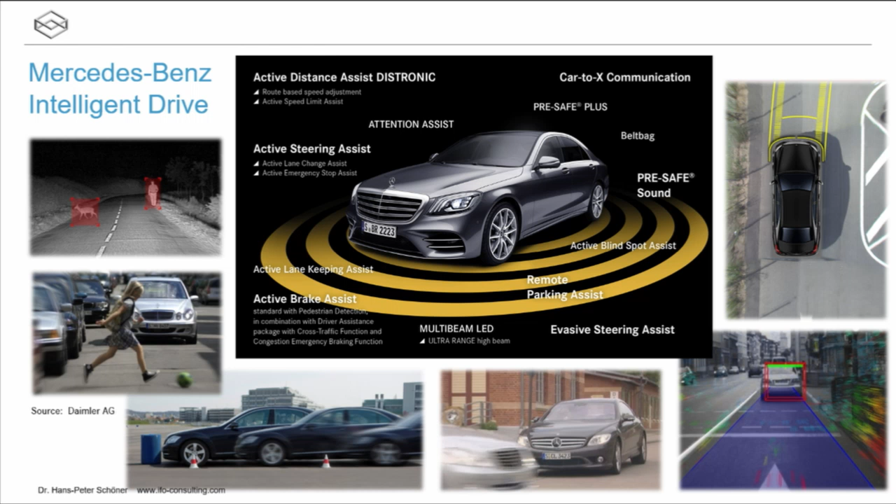To see what is state-of-the-art, I show you this next short movie, which tells us what is available now. You can start a car from outside with an app. You still have to make sure you are there, and then you can drive normally. But the car knows where it is. What is the speed limit which is appropriate?

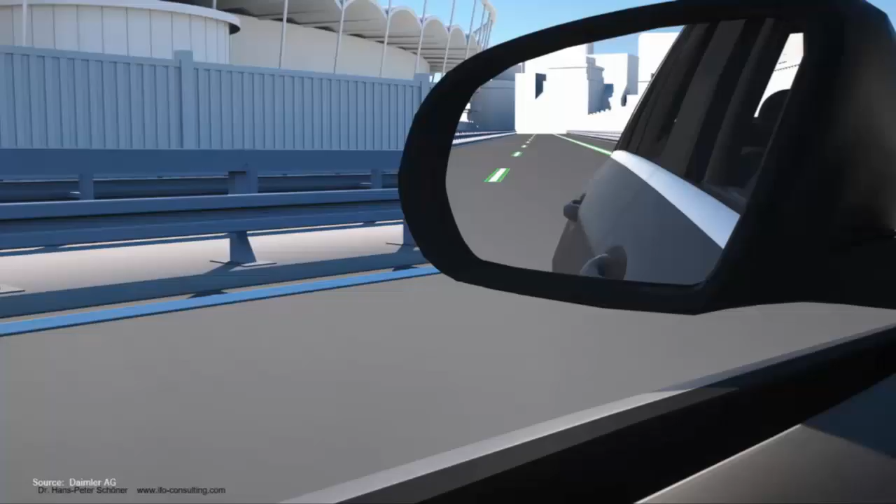Maybe when it's coming to a roundabout, to know there is a roundabout and you have to slow down to drive around a roundabout, even if you are in a mode of speed control. It knows about the curves. It can follow a track. It can pass other vehicles.

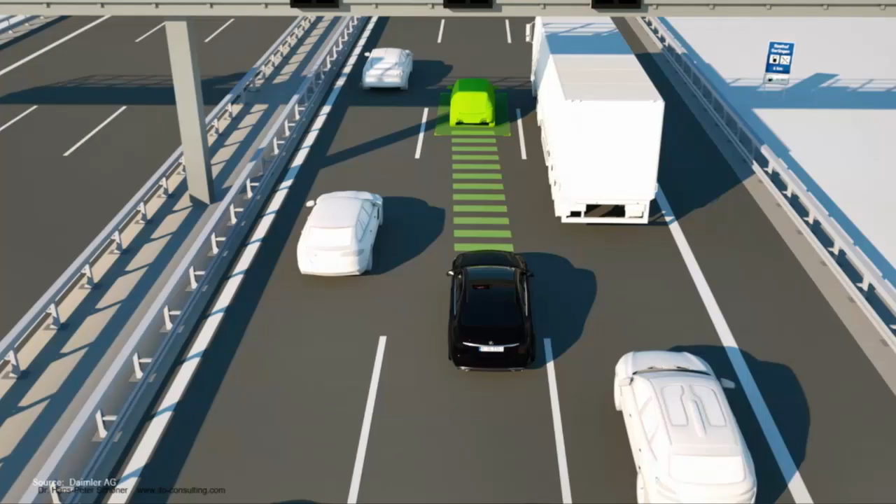But here, a situation where you didn't pay attention and this vehicle will still keep the distance and even slow down. And in traffic jam configurations, it is able to follow other vehicles, even when the markings are complicated with different colors, and even if the markings are not there.

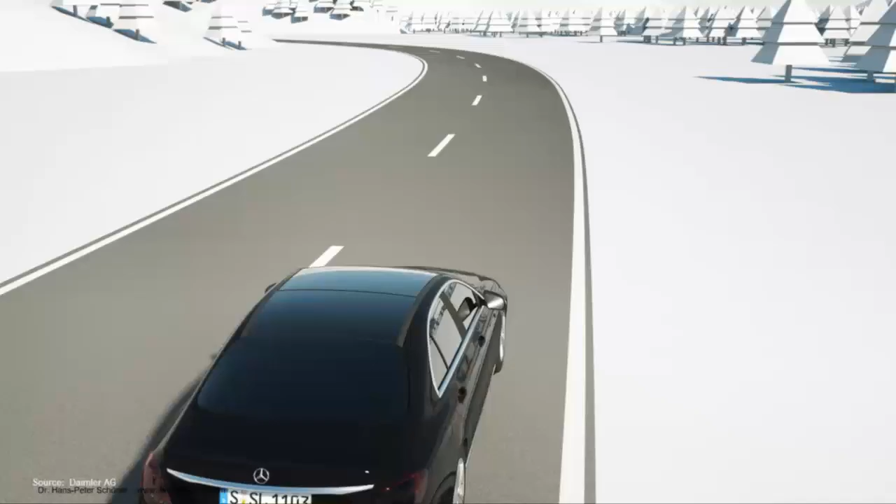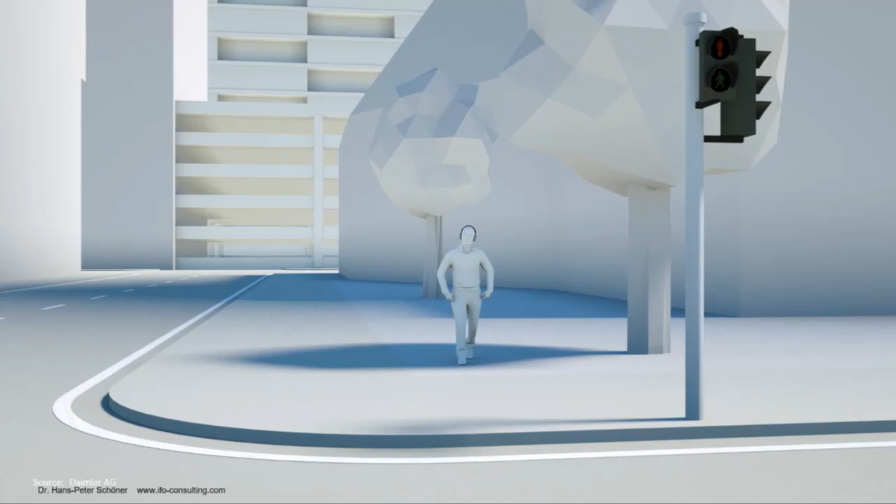If there's a traffic accident among Mercedes cars, the information is exchanged so the other cars know there will be something ahead. And driving into cities, it will know now it's in a city. Braking, autonomous braking on cross traffic, on pedestrians which are not attentive. But if the driver acts, it will not do anything.

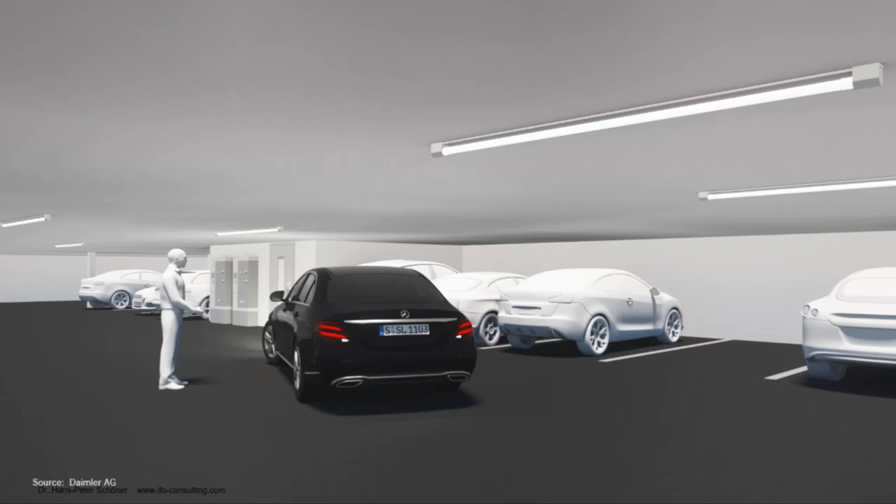And at the very end, of course, you can also park a car, being outside of the car. And all this is possible now already with vehicles you can buy, an S-Class, an E-Class, or cars of this size. And all those systems will probably be brought down to smaller cars like a C-Class or even an A-Class. And it's not only Mercedes-Benz, it's also other car manufacturers who are supplying similar systems right now.

One of the important things of all those systems is the driver is still responsible for everything the vehicle does. It's assistance systems, and we call them level 2 systems. So if we talk about autonomous driving, I want to point out what is the challenge there from going from where we are now to autonomous driving.

There are stages of autonomy which are defined by NHTSA, and level 0 is no automation. Level 1 is you have one specific function, but level 2 is what you have seen in the video. More than one control function, but the driver is expected to be there.

He is the one responsible for all the driving task, and he has to be available at short notice to take over and to turn off the system if necessary.

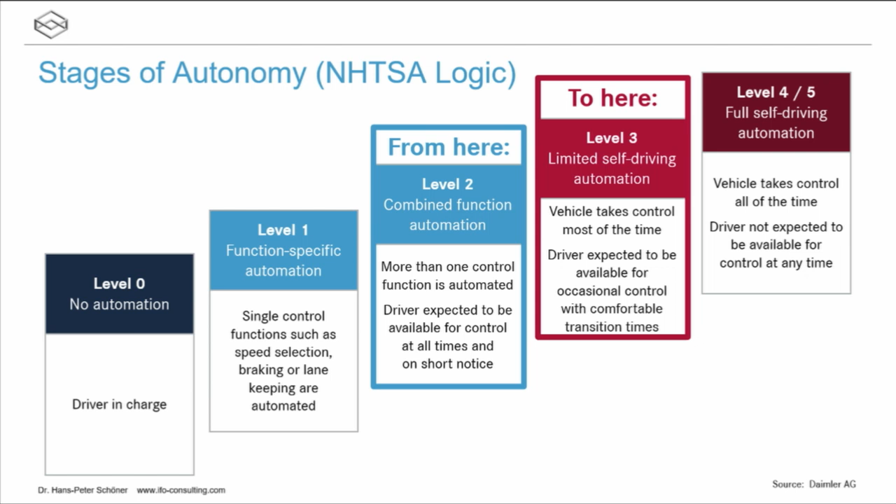Why? Let's first look at what has happened now. We have introduced assistance systems to the cars, and those have to help the driver in situations where the driver makes a mistake. And up to now, on German highways, that's about 7.5 million kilometers between mistakes which lead to big accidents. And in such situations, the assistance systems had to work. So those are relatively rare situations.

If you look in detail at the statistics, you find out most of these accidents are due to human errors. So you think, okay, human errors we can help. But the challenging thing is, in between, there are 7.5 million kilometers where the human driver doesn't make those mistakes. He does a lot correct. And now we want to automate all those things. And that means we have to drive those 7.5 million kilometers and maybe even more without any mistake, without any dangerous mistakes, of course.

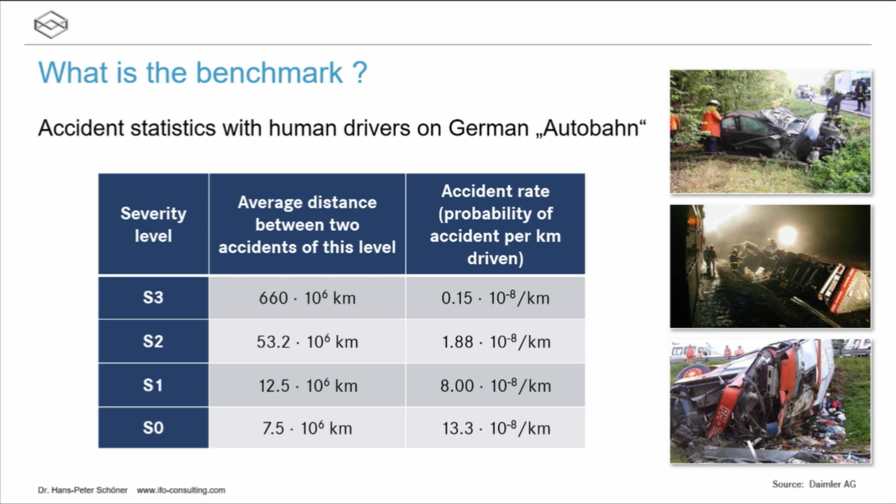And it's very similar in Sweden, it's a little less. You have longer distances and less traffic. In the US, it's significantly higher, and in most parts of the world, it's significantly higher, a factor of 10 to 100 higher than those numbers. So these are pretty good numbers, and everybody accepts that this 10 to the minus 7 per hour is an accident rate which is acceptable.

What does it mean for level 2 and 3? Level 2, again, the driver watches. Level 3, the driver is allowed to leave the steering wheel and to watch other things like a smartphone, reading emails, writing emails, and so on. In level 2, the system is designed so the driver can respond with a reaction time of 0.7 to 2 seconds, which is the normal range of reaction times, to warning tones, which tell the driver, now you have to react.

In level 3, we talk about reaction times of 10 seconds, which will probably be in the law. But even if you have lower reaction times, from 2.5 to about 5 seconds; 5 seconds is, from my experience in the driving simulator, the time period when most people, 95%, can react to some warning. But the other 5% need between 5 and 10 seconds.

What does that mean? If you're driving at 100 kilometers per hour, that's about 30 meters per second, you drive in those times 75, 150, or even 300 meters. 300 meters, if you look out from your car, is something where you barely can see what is there. So if you talk about 10 seconds reaction time, everything has happened in traffic. It's more like 3 seconds ahead you see what is going to happen, maybe 4 seconds, but not much more.

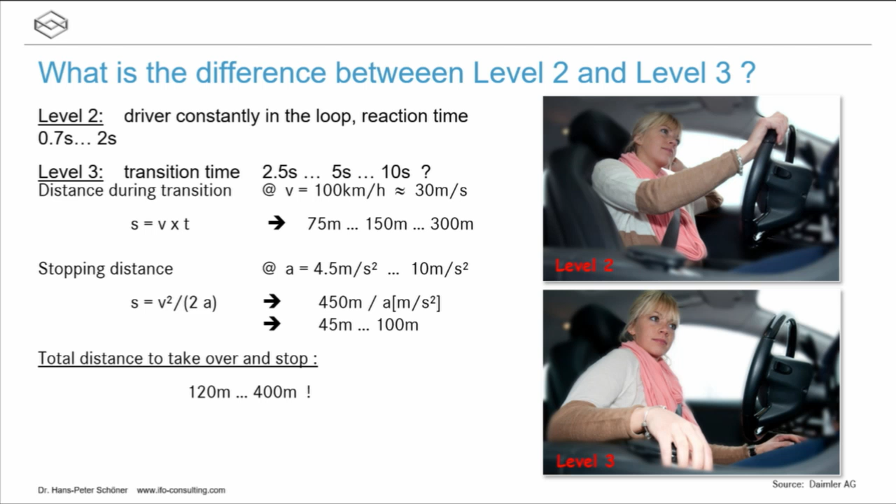And if you want to stop at a decent deceleration between 4.5 and maybe 10 meters per second squared, which is the physical limit on a dry road, then stopping is another 45 to 100 meters. And if you add those up, the reaction time of 2.5 to 10 seconds means 120 to 400 meters. You have to know in advance whether the driver has to take over or not.

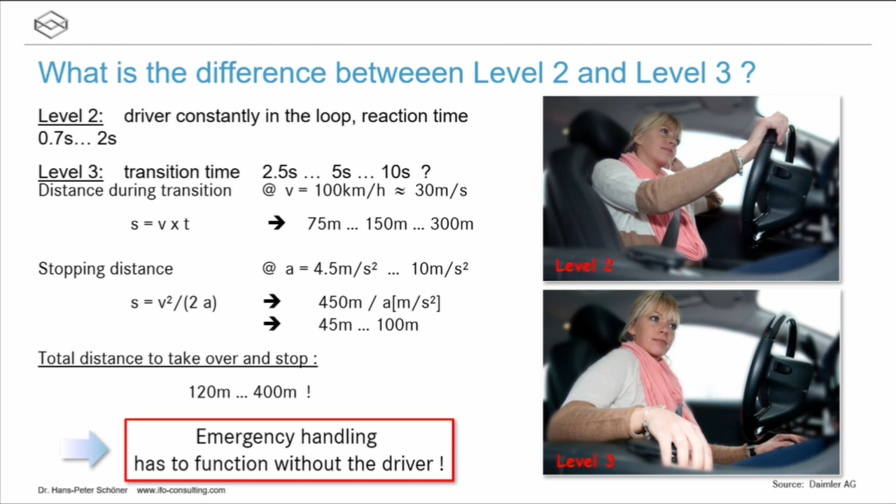That means emergency handling has to function without the driver. You cannot afford to tell the driver, oh, I have a problem now, I cannot brake, do something. The vehicle itself has to do it. It has to solve every urgent problem on the road by itself. If not, it doesn't work.

So this is my summary. Before an autonomous vehicle will drive you anywhere, it has to prove that it will not drive you into trouble. So how to prove that? And first we have to look at what is really the risk. Look at it from an engineering point of view of not only I'm afraid, but what is really the risk.

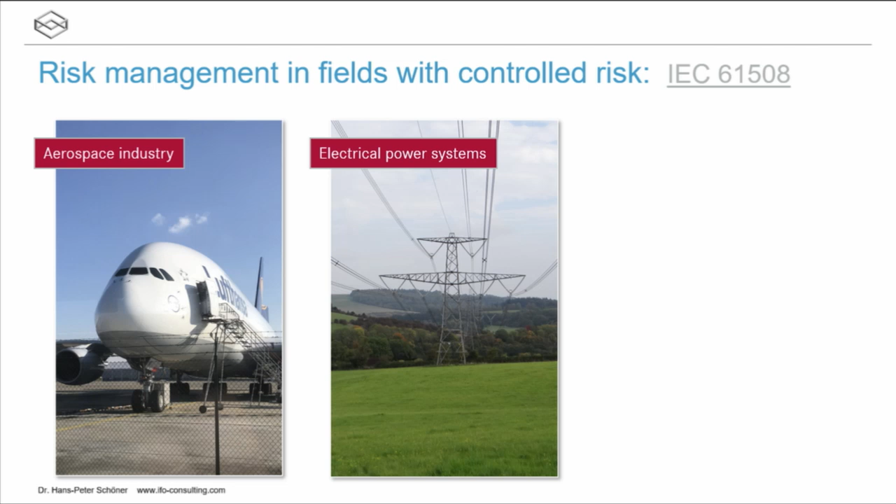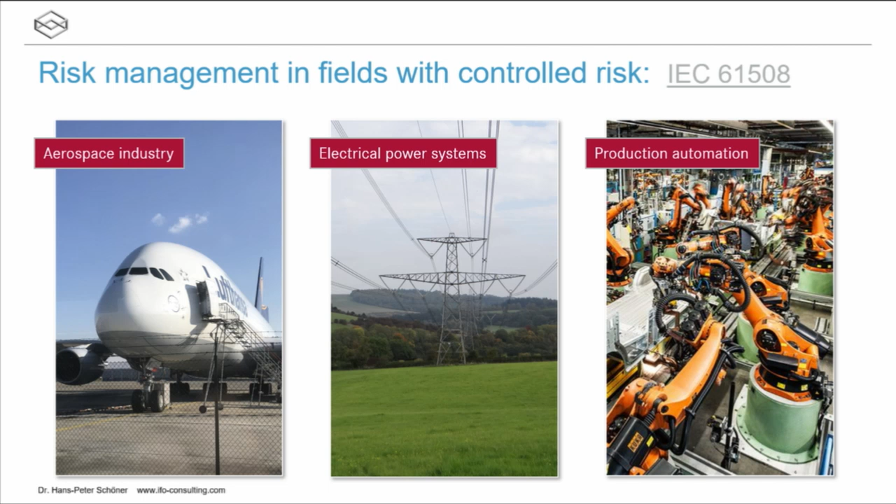Look at other fields of controlled risk: aerospace, electrical power systems, power plants, nuclear power plants even, but also production automation. They all use one standard, IEC 61508, which is the basis for how to deal with risks. There's one specific automotive version of this 61508. It's called the ISO 26262. And that's a risk-based safety standard.

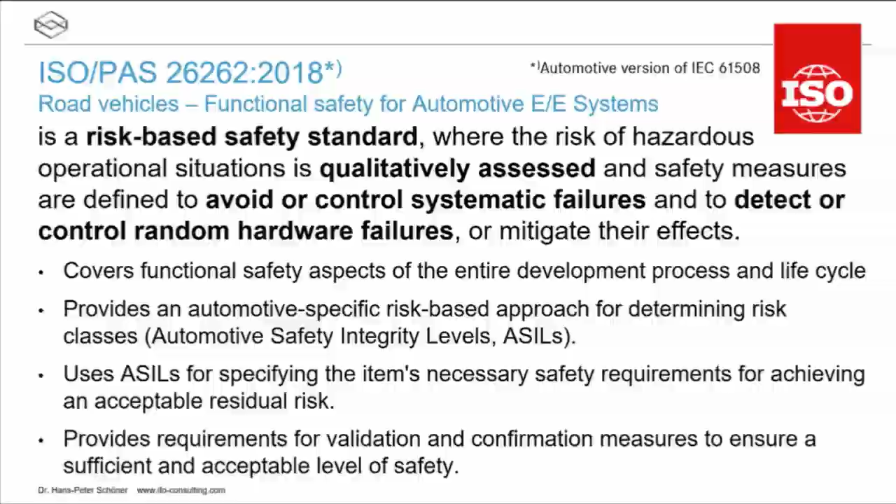It looks at hazardous situations. They are qualitatively assessed, and each dangerous, risky situation should be avoided by systematic control design or avoidance procedures. And also random hardware defects have to be avoided in a way that the number of faults per hour is less than 10 to the minus 7. There's much more to it. If I would go through that, that's a whole lecture on its own.

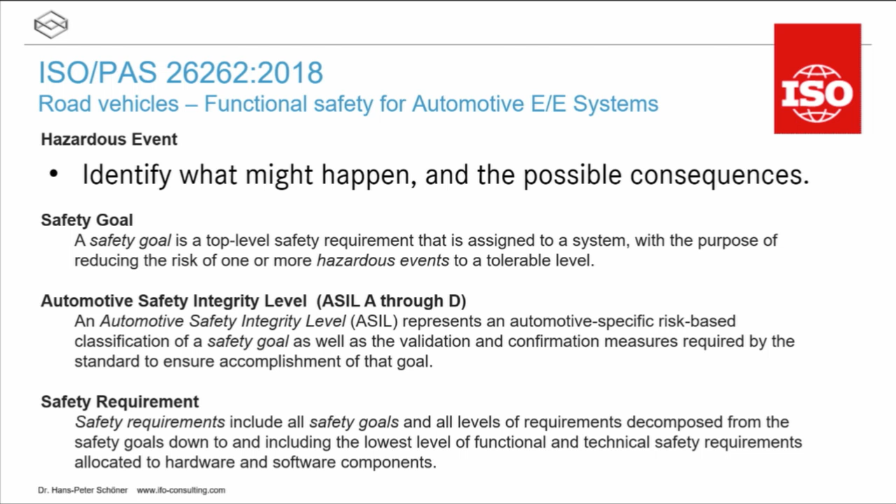But the basic is we talk about hazardous events. They have to be identified, what might happen, and what would be the consequences. You have to set up a safety goal, which is a quantitative goal, what kind of level of safety you want to reach in numbers of failures or deadly accidents per hour. This leads to safety integrity levels.

Depending on what kind of system you automate, if it's a really dangerous system like autonomous driving, you come to an ASIL D level, which means very rare accidents, and that comes to the level 10 to the minus 7 per hour. And this is used industry-wide. And from that, it's broken down to all the components in the vehicle: what is the safety requirement, the reliability requirement, and the availability requirements for that single component.

As I said before, this safety level assessment looks at 3 things on the level of risk. One is the severity of an accident, the exposure. That means how often do we come into a situation where that could happen, from incredibly unlikely to high probability that would happen almost on every drive. And then controllability classifications. That means in case you come into that situation, will you or your vehicle be able to control that situation?

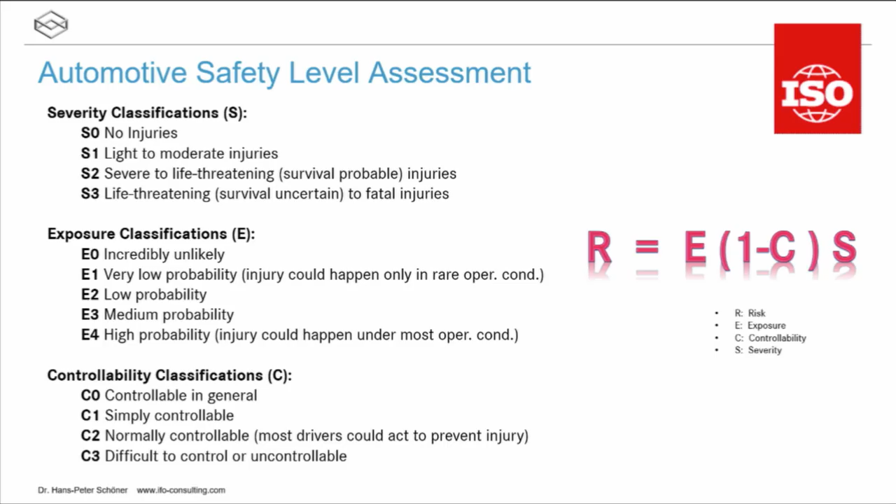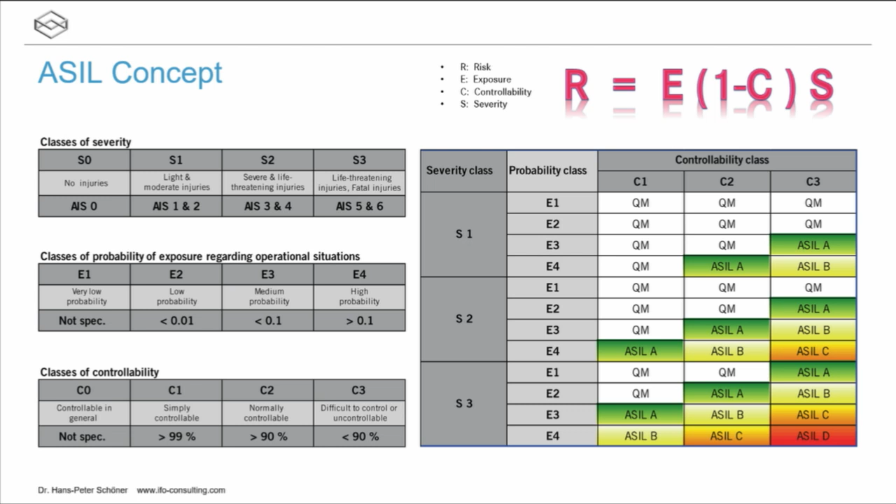And again, the ASIL concept then, with these severity classes and probability classes and controllability classes, says, okay, you need some kind of ASIL class. This is standard for all components in cars, and if you want to drive autonomous, it always ends up in ASIL D, the most relevant factor.

So how do you design a trustworthy system? We have seen several examples, and I think you have touched that idea yesterday already. First of all, redundant self-monitoring concepts. Redundant means in a system design you have some critical systems with high failure rates. You need several of them. And then if one fails, the others can take over. And then you can calculate the failure rate of the complete system.

Important is that these formulas for the mathematical treatment only work if all subsystems are uncorrelated. If all those systems are supplied with the same power source, and this power source fails, then all of them fail at the same time. So then you don't have an improvement in reliability. So you need to make sure they are uncorrelated.

And you do that by using diverse components. You don't take 3 camera sensors. You take a camera, you take a radar, and you take a LiDAR sensor, for example, in order to have diverse components which fail under different conditions.

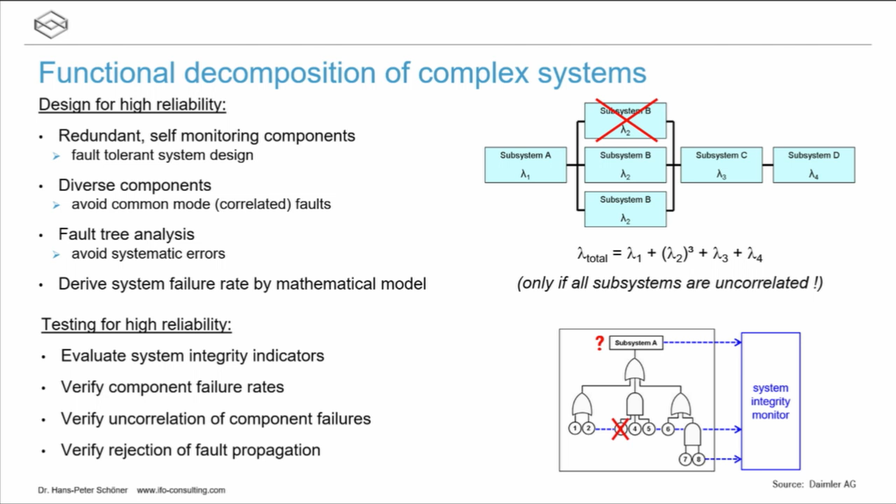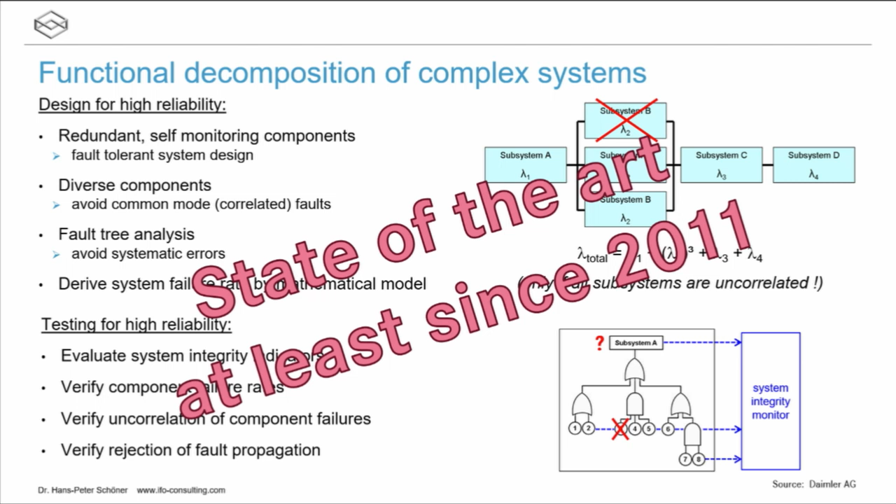All this is a standard since 2011. It has been used for the development of automotive systems up to now, worldwide, at least at all the large car manufacturers. But you find out that with this ISO 26262, there's still something missing. The ISO 26262 defines some kind of risks on the highest level. The question is, did you cover all the risky situations? Did you think of all? And it's not really covered in a standard how you do this.

There's a new one which was just released this year, and it's not final. It's in development phase, and it's the ISO 21448. It's called the safety of the intended functionality. And it tells you how you should proceed to find out if you covered everything. And it covers a lot. It does not cover that somebody intentionally tweaks the system, so these are the security aspects. This is not covered there. But all the others from the technical part are covered. And it's giving you some guidelines on how to design such things.

Internationally, there are two requirements for autonomous vehicles now which have been written down. In the EU system, there's this sentence: when in the automated driving mode, the vehicle shall not cause any traffic accidents that are rationally foreseeable and preventable. So foreseeable and preventable. If you don't foresee it, you might miss something. And preventable, you might foresee something and there is no way of getting around this accident. It is accepted according to this sentence.

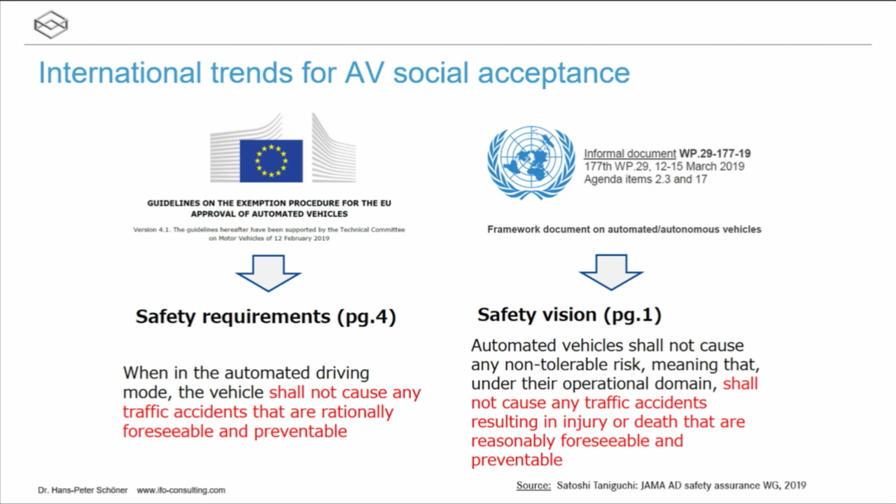The United Nations have a slightly different wording. Automated vehicles shall not cause any non-tolerable risk, meaning that under their operational domain, it's important, under the conditions for which they are built, they shall not cause any traffic accidents resulting in injury or death, that are reasonably foreseeable and preventable. So that's the same condition again. Who is the second one? Which organization is that? That's a United Nations working group, WP, yeah.

If you look at that more in a picture, driving with an autonomous vehicle in the world, first you need: what is my operational design domain? Do I really want this vehicle to run under all weather conditions? No. No human driver would drive out in a snowstorm. Why should I require that of an autonomous vehicle? So I draw a limit line and I say, this autonomous vehicle is designed for good weather conditions and it's designed for normal traffic and maybe only on highways for a start.

So we cut away a lot of very risky parts, but then we require that the vehicle by itself can decide whether it is within the operational design domain. That's part of the responsibility: the vehicle has to decide I'm in or out. It has to know the weather forecast. It has to know what type of road it's on. It has to look at the conditions of the traffic.

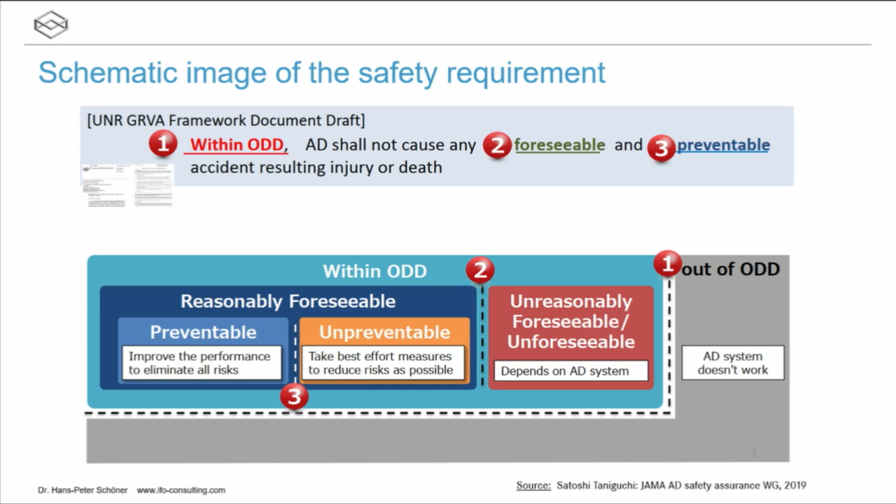And no human driver would even distinguish whether it's an old person or a young person. If it's in my way, okay, I try to brake, and if I hit it, that's it. But if I leave my way and drive through a path where normally you should not drive, and you hit somebody there, you'd better not do that. So there are some results for the behavior of the system, what you should not do to avoid such situations, but you cannot claim that here you will come out without any accident. Okay.

And again, this may be the same information: foreseeable, unforeseeable, preventable, unpreventable. Foreseeable and preventable: here you can think of situations, of scenarios which you can test. Unforeseeable and preventable: you have to learn what the new things are and find a way to work with them. And you have to implement a learning procedure. But then there are those foreseeable, unpreventable things. Here you can only avoid some huge accidents; mitigation, reducing the risk, is the main goal.

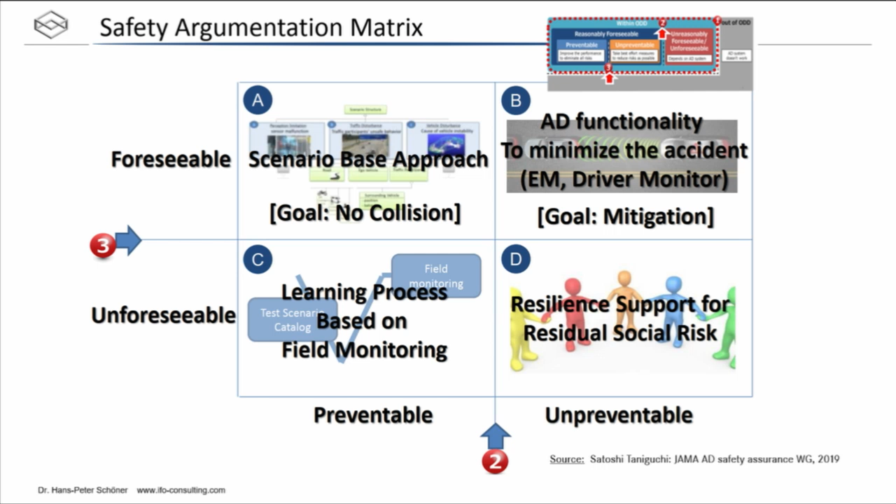And there are still things that are unforeseeable and unpreventable. Even a human driver cannot do anything about them. The bridge which collapses just in front of you, like in Italy some time ago, it's not the driver's fault. It could not be the fault of an autonomous vehicle, but there is still some risk of an accident, and we need insurance to cover that. That's normal even with human drivers. Now let's look at this risk equation again and look back.

As the severity, it has been addressed by all the passive safety systems in cars. Limit the consequences if you come into an accident, provide suitable protection, and facilitate rescue. Master extreme situations, that's the field of controllability. That's the driver assistance systems domain. Detect dangers early and react fast and appropriately, and up to now help the driver to do that.

All this we need for autonomous vehicles as well. But the exposure, how often do you come into critical situations, up to now has been reserved for the driver. He was responsible to find ways or to drive in a way that he doesn't come so often into dangerous situations. And that's a new task for autonomous vehicles. And what is that? It's looking ahead. It's driving predictively. So that is look ahead, know early enough what you are going to do.

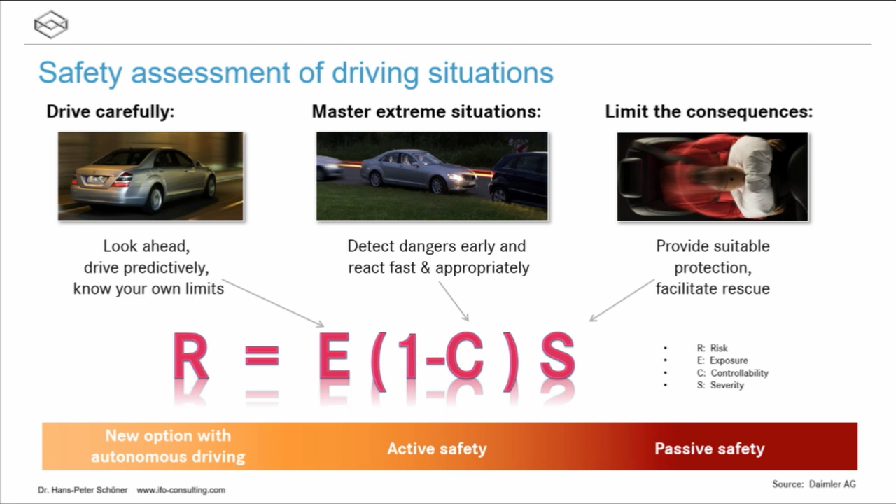But this means also drive in a way that others know what you are doing. Put your turn indicator. Don't brake too hard. Things like this. But also know your own limits. Don't be surprised by some traffic situation which you cannot handle. Drive in a way that you can handle those situations. That's a new option with autonomous driving. What does that mean?

All the traffic situations you can divide into, most of them easy, normal driving, but then there might be complex situations. From them, the critical situations may evolve, and those lead to accidents and severe accidents. And I put this into these two coordinates because we can choose independent parameters and controllable factors. Bad weather, chaotic traffic, missing infrastructure would make it more difficult or more complex to drive.

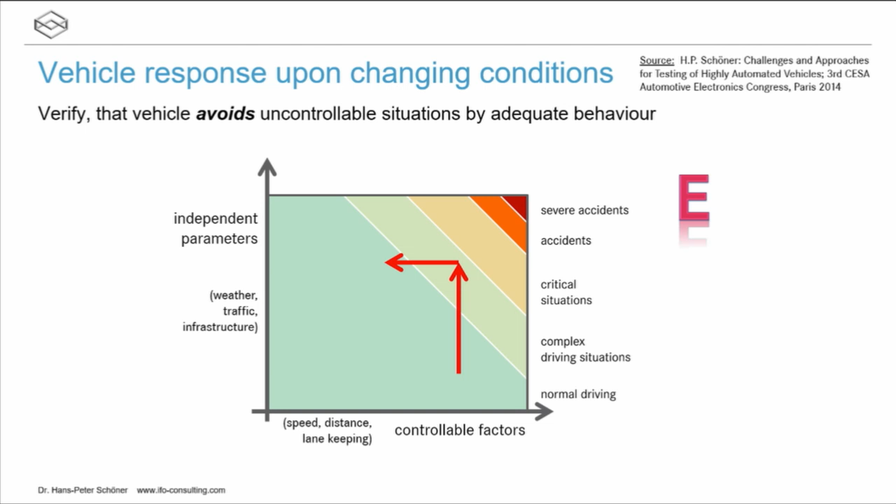But there are always ways you can reduce the risk and reduce the exposure to risky situations by reducing your speed, increasing your distance to other vehicles, and by good lane keeping, which is the lateral distance to other objects or other parts of the traffic environment. So what you have to do is, if the situation gets worse, do something to make your driving more simple. One of the key things people have to learn during driving school. Okay, I go through that.

What kind of reasons for accidents do we have? First, we have failure of components. Hardware deficiencies, something doesn't work, like the one rotor in the quadrocopter which fails. Actually, in traffic accidents, we have only 1% to 2% of actual statistics of accidents. The components are designed very well, and they are not the main cause for accidents in modern vehicles, at least for new ones. If they age after 10 years, you get more and more of those problems.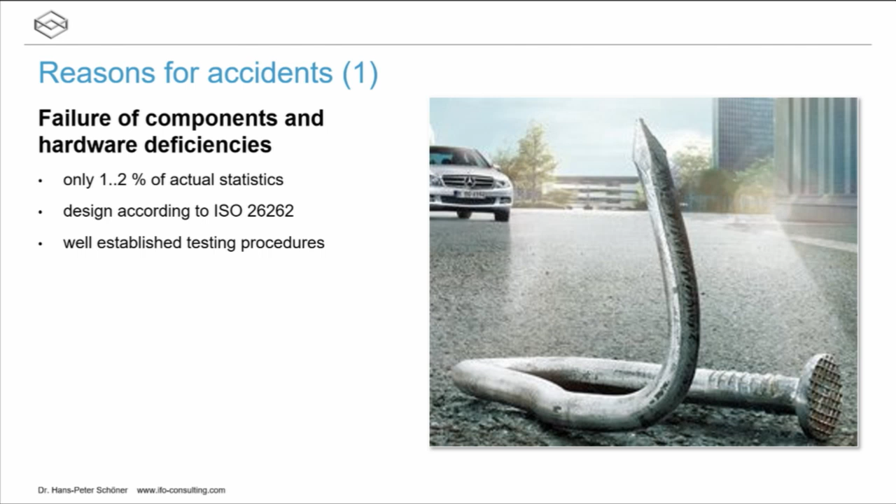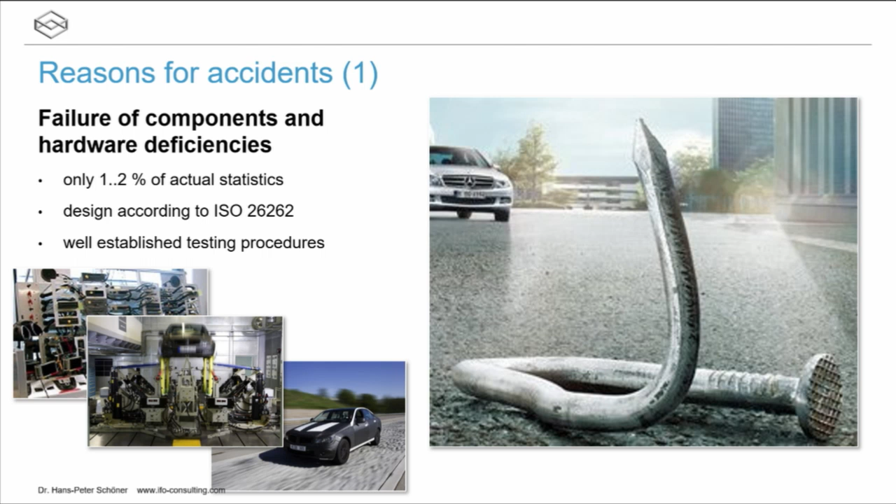They are designed according to the ISO standard. And there are well-established testing procedures on benches, on mechanical testing devices, and on test fields. So I think this is well covered. And that will not be different for autonomous vehicles. It will be the same thing, only for more components.

What is more challenging with autonomous vehicles is deficiencies in sensing road, traffic, and environmental conditions. A camera would have a picture like that. Actually, I took this picture in Sweden some time ago. Low-level sun, rain just finished, and you had a strange traffic situation. You barely can see, okay, here are merging two lanes. So you have to watch for oncoming traffic. Is this oncoming traffic or not?

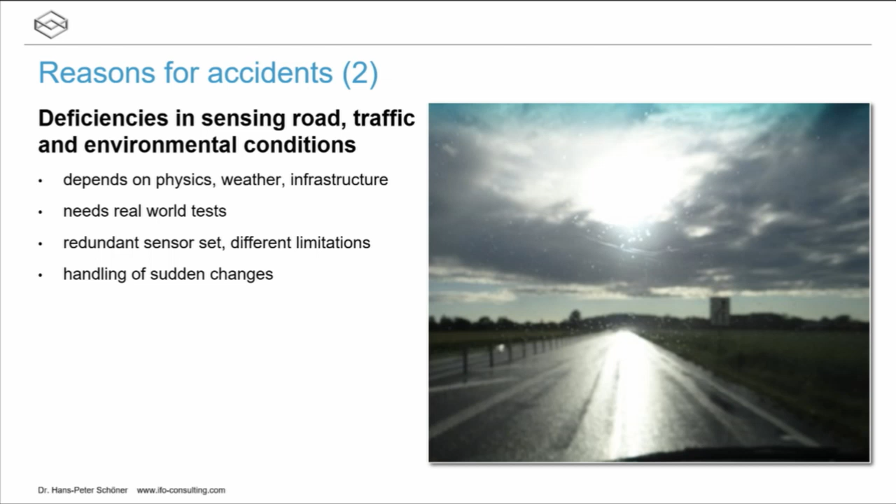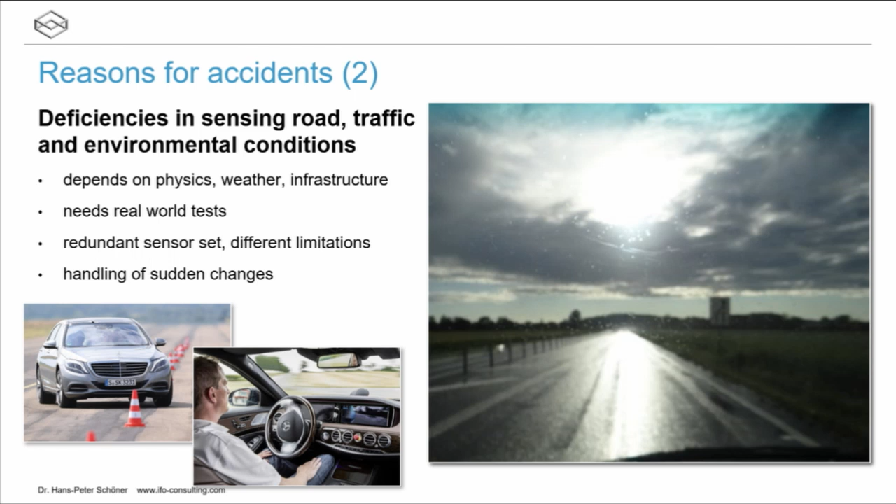Yes. So situations like that, you have to test in the real world. There's almost no way to test them on the proving ground alone. You have to drive around the world, because if not, you don't see all those different situations. But of course, you can test the behavior of the vehicle in such situations when you are on the proving ground. You can test the behavior of a failure of a sensor and then find out on the proving ground what the vehicle will do, but also driving in real traffic, getting experience. It's needed. You cannot do without that.

And there are so many strange situations nobody would think of. But even the ones you would think of, you can test. There are a lot of complex situations with a lot of variables, with a large parameter space, but they may be decoupled from the physical sensor input, and so they have a high potential for testing in simulation.

And so using simulation tools, these control algorithms are easy, not easy. They are tasks which can be done in the office, in the laboratory. You don't have to drive out on the street to do that. Another thing is behavior dependence. Know and obey the rules.

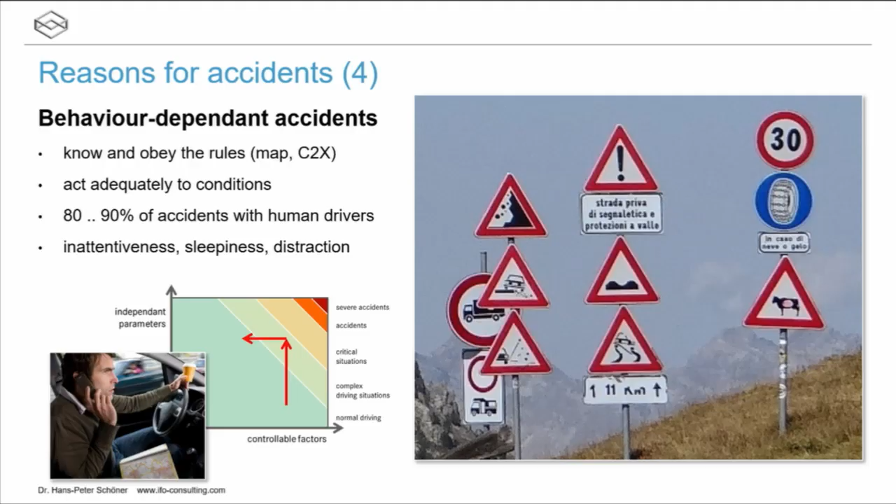But driving drunk for an autonomous vehicle: the autonomous vehicle has to judge whether all the sensors are okay, whether all the computing systems are okay. All the systems have to be functional. If they would start without that, that's something like driving drunk for a human driver. Okay, and again, something like that you shouldn't do, and that's the important thing. If you think it's getting more complicated, do something.

And there's one fifth category of accidents, and that's the faulty interaction of the driver and the vehicle. Does the vehicle understand what the driver is telling to the vehicle? And does the driver understand what the vehicle is telling to the driver? For early aircraft automation, this was the major cause of accidents.

The pilot brought the vehicle in an autonomous flight mode, but then something happened and he hit the control stick. And in early times, this was the signal for the automation system of the aircraft: oh, the pilot wants to take it back, so give it back to the pilot. And it was a small light which turned off. Now it's again in pilot mode.

But the pilot just continued flying, and the aircraft is stable when you don't touch anything normally. But if there is no pilot who controls that, it can give severe accidents. So it's very important that the human-machine interface works well, so the driver or the pilot understands now it's in the responsibility of the vehicle, and the other way around the same.

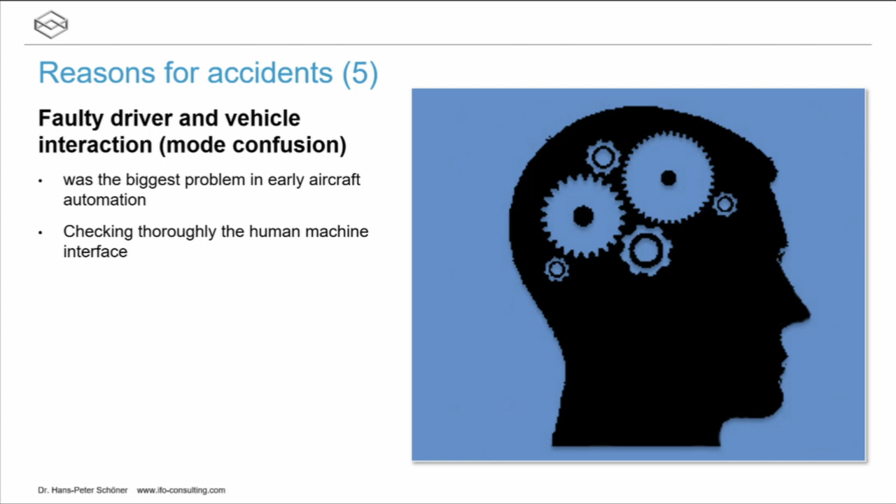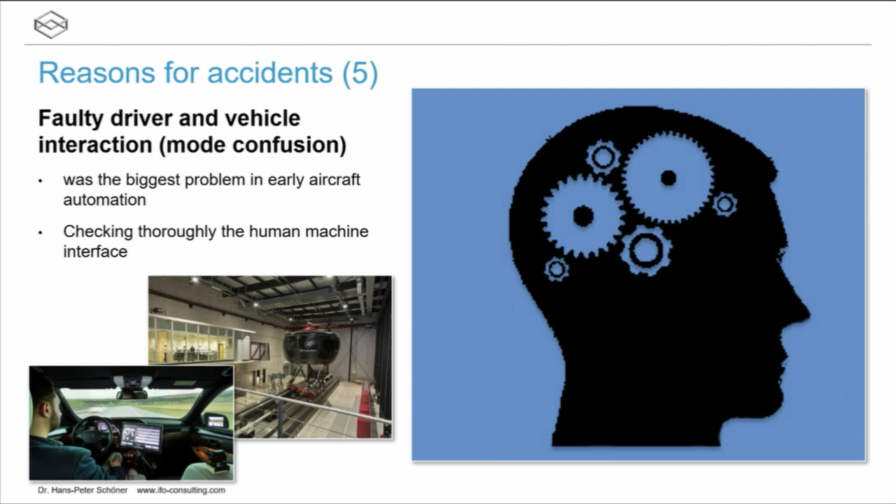And to check that, we have driving simulators where we can test the interaction of real humans with at least the software which is within the vehicle, and do experiments to understand well what is really happening.

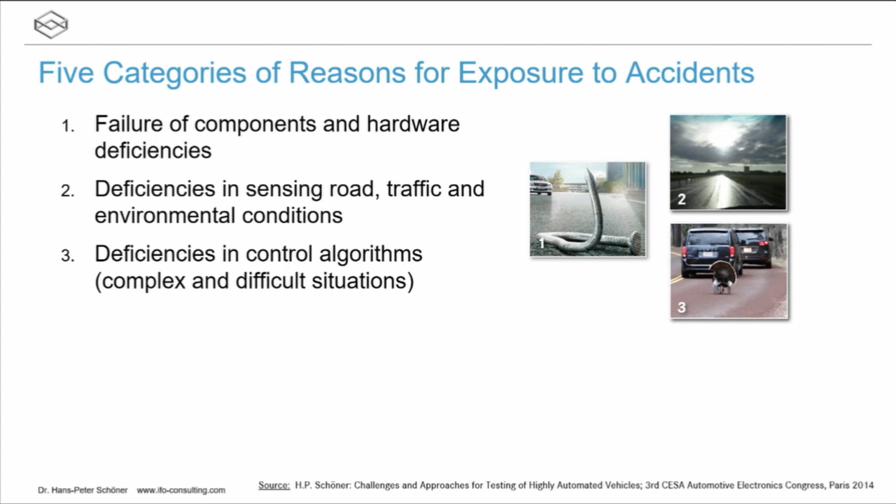So in summary, we have those hardware components, those 5 categories, and there are 3 which are related to external conditions. It is mainly you have to understand what exists in the real world, what kind of situations there will be, and what kind of weather conditions are there. So that's a matter of standardization on what do you want to test, what do you have to test. And here, the components and the human-machine interface, it's very design-specific.

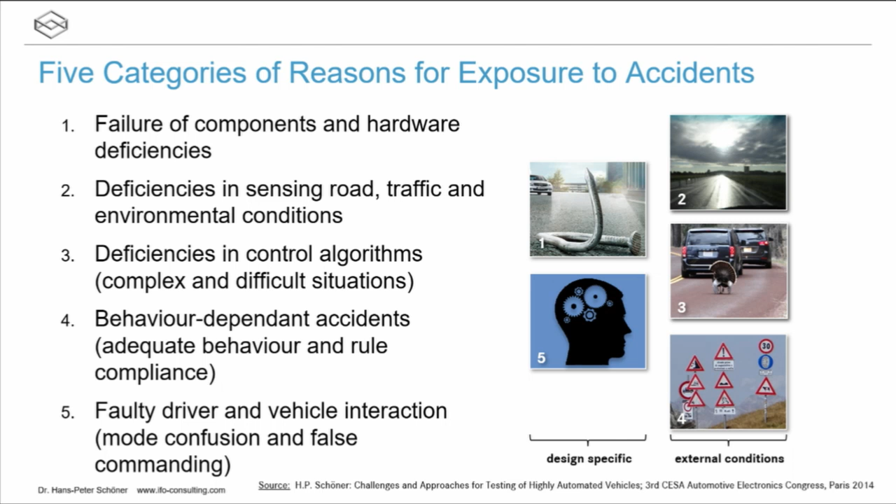So that was the reason on those things we talked about with other companies, with other automotive vehicles, and that's who has the best design mechanically and or electronically, and also from HMI. And to test those different things, software in the loop is the thing which you can do with those 2 categories. And driving simulation is the one, and that was one of my tasks, to work on those simulation tasks. What kind of tools do you need for that? This is well established, and this is field test, mainly field test.

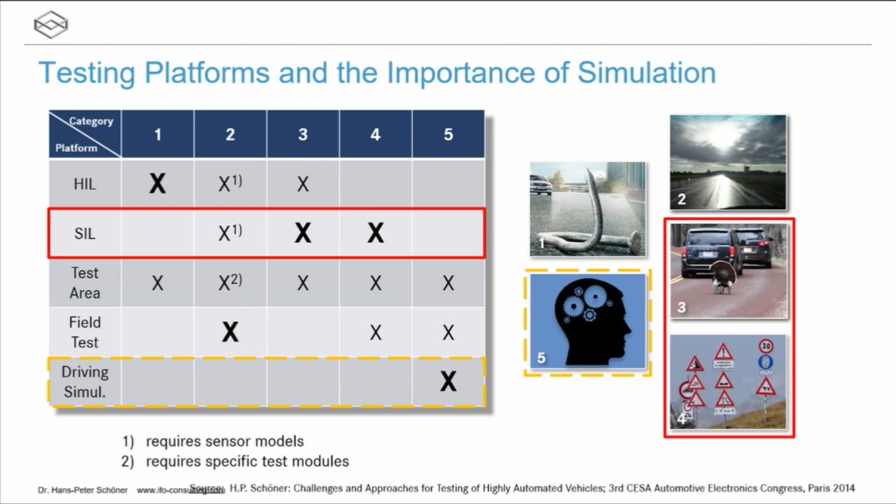Let's have a closer look at the controllability and what we do in the driving simulator. That's what we call the dome. At the interior wall you can project a virtual world, and there's a whole vehicle in there. And with this projection of the virtual world, you give the driver a setting so he's driving in this virtual world.

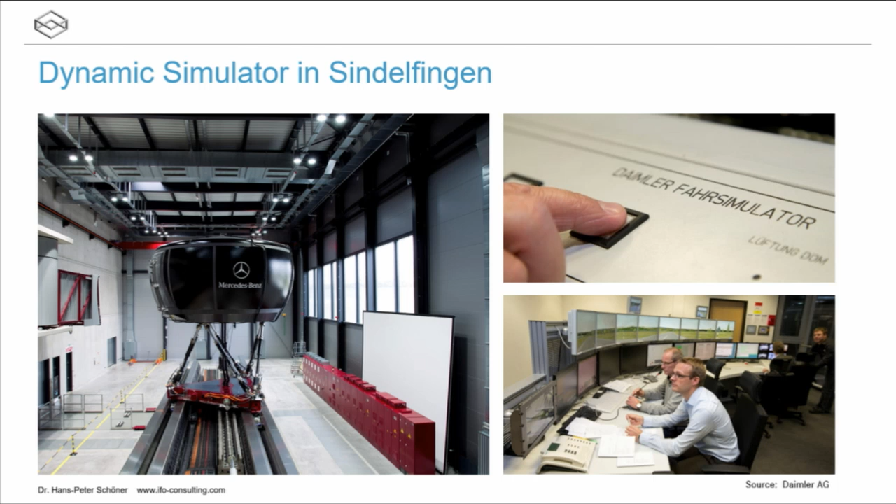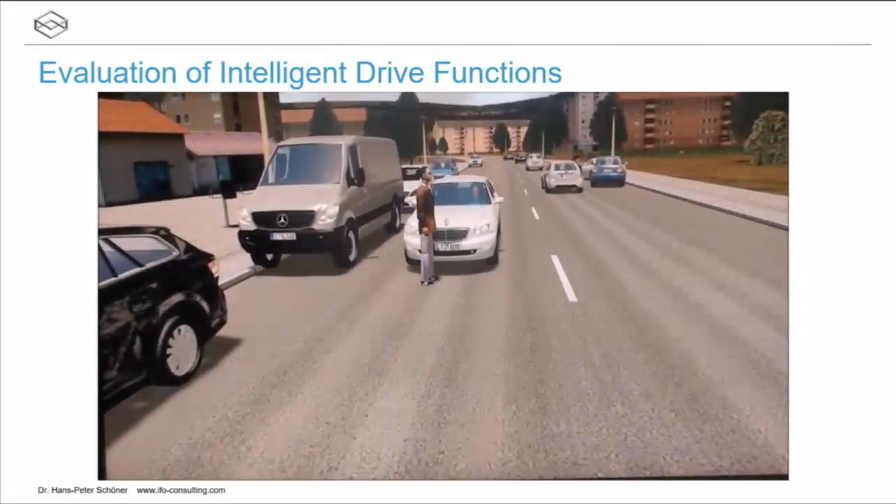Just some examples. That was emergency braking development, testing on a pedestrian, which comes out here. You design that in simulation. You can set up how a pedestrian jumps over here, and you have something going on there to attract the person who is driving to watch that, and then it's a bigger surprise, and you get a wider spread of reaction times of the persons.

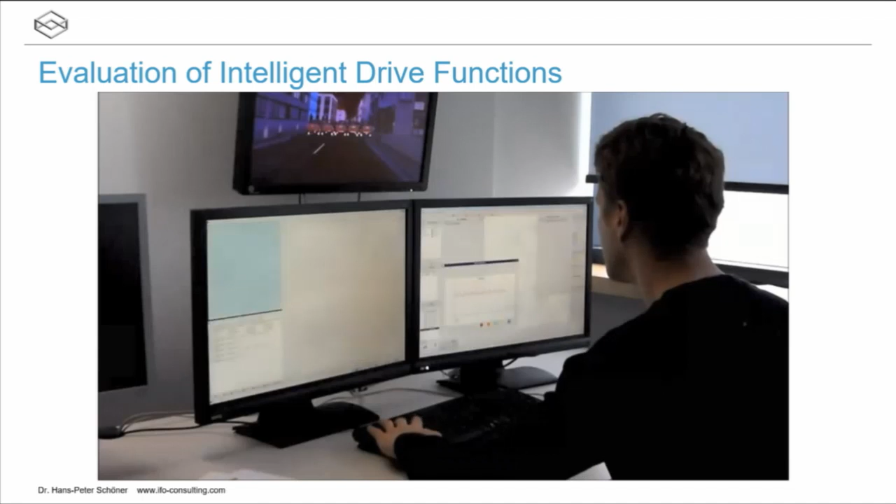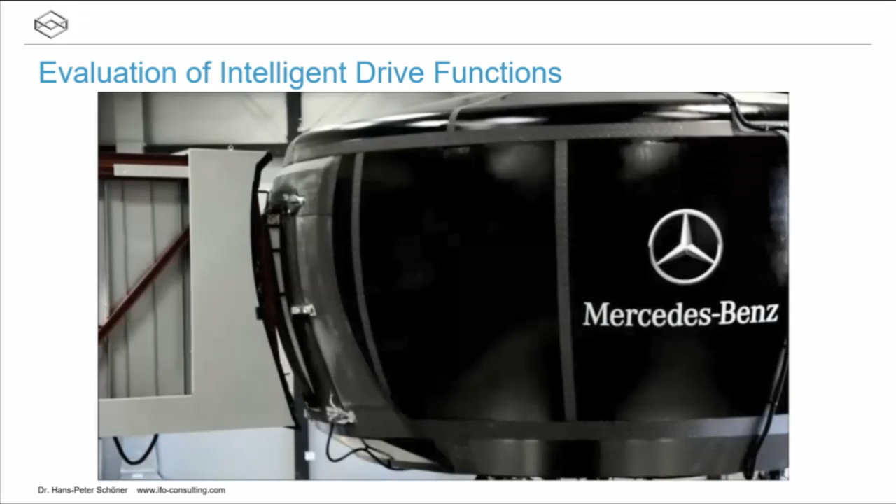And with situations like that, we found out in such situations it's too late to brake. And that's the other situation. You come here and there's a car coming from the right, and he might not have priority, but he cuts in. And in that situation, you cannot react as a driver. You cannot react fast enough. And that was the reason that we designed systems to be able to perform in those situations autonomously and not waiting for some driver response. So that was the first step of autonomy.

But the good thing about the simulation here is you can do things like that, which are an accident, but which are really not dangerous for the driver, for the test driver, for the persons with which we tested those situations.

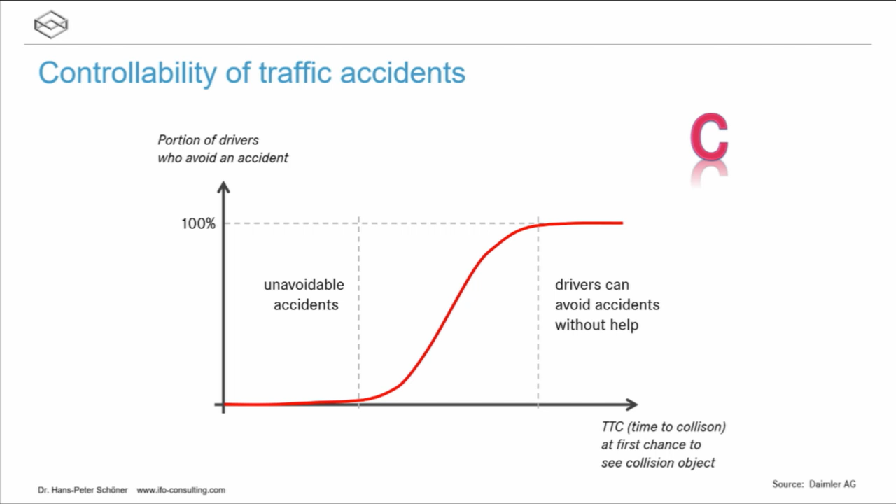And there's this curve of the normal driving population with distraction. If you have a warning system, an assistance system in the car, which warns you when it sees something like that, it will be a lot faster, or at least a lot of the people which are not attentive will react much faster. So the green line will be the performance of the population with an assistance system. But still you have unavoidable accidents.

They're a little shifted more to the left because the reaction time of the driver is significantly reduced on average. So you have accident avoidance until a certain time to collision. And below that, at least on average, you have accident mitigation. But still the unavoidable accidents.

If you would brake autonomously with an autonomous vehicle, you could save a little bit. And that's the reaction time. Normally, you warn somebody and the driver has to react. That takes some half a second or something like that. And a radar is a little faster in detecting speed differences to the vehicle in front of you. So that's the reason why it's here, but still there are unavoidable accidents. So that's the matter of controllability.

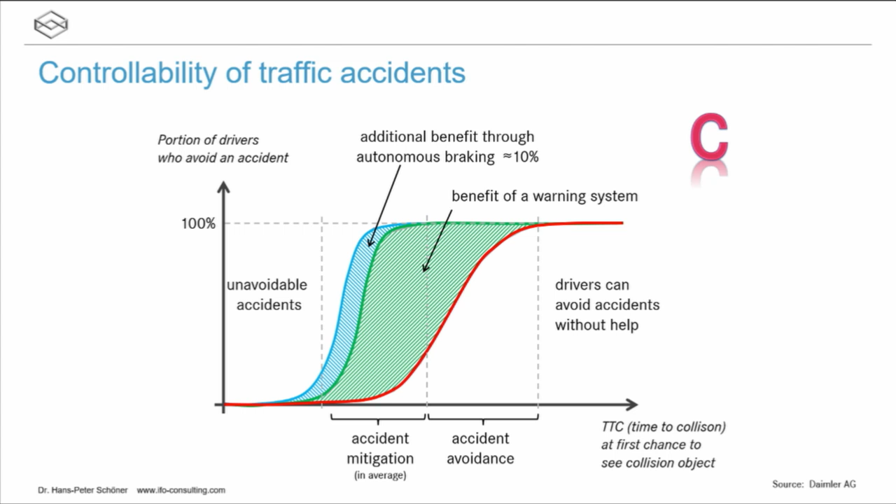The main message is, with all kinds of situations where you are not controlling the complete situation, you cannot make sure that you control 100% of the situations. So this part here is the dangerous part, and you have to avoid that by reducing the factor of E, the exposure. So how can we reduce the exposure?

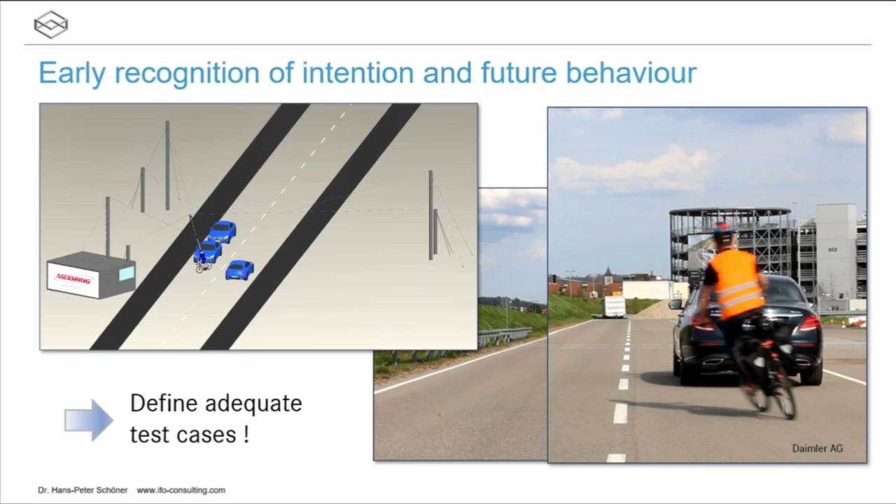And so that's looking ahead, and nobody has done testing procedures up to now. We have been implementing them at Daimler, and we're working on something like that, to define adequate test cases, which should be done by everybody in order to be able to do something like that. So by now they have better tools for simulating that.

And then let's look at the driver again. I will come back to that tomorrow a little more. Very important: a driving pupil is tested for collision avoidance. He is tested for situation assessment, for judging his own skills, for judging the conditions of the vehicle, own position, and rules and their limitations.

And he is tested whether he can update his plan in due time, that he can handle surprises. He has correct assessment of his own and of other people's reaction times, and he has to be able to handle cooperative driving situations. This needs to be tested as well. And a lot of this, for human drivers, they learn over time. So the same challenge as with autonomous vehicles. And we need to define measures for safety of driving in order to work quantitatively with that.

Okay, so that's this. The vehicle has to judge whether a situation is still acceptable or if it's getting dangerous in order to do something. This is the basis for learning behavior, and in addition, it has to show that it can reduce the level of danger by its own actions.

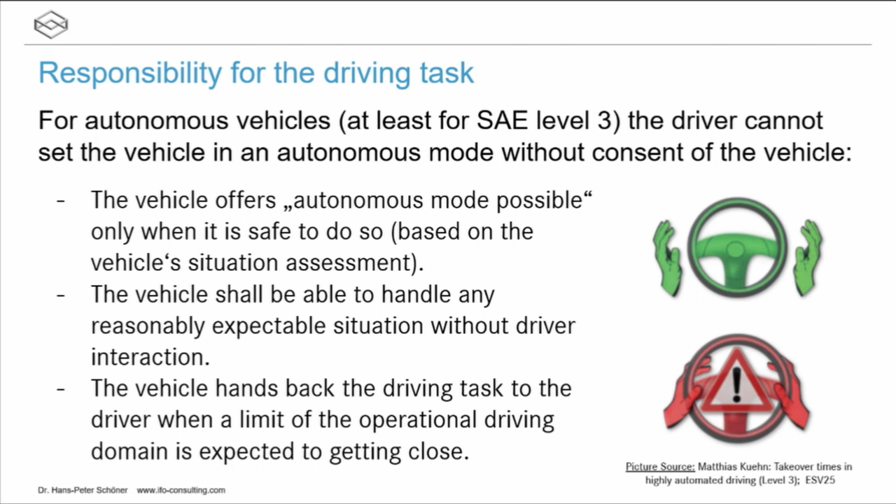And it will give back the task of driving to the driver in a long enough time, around 10 seconds, to tell them, now it's your task again. That means when they come out of situations where the operational design of the vehicle is not able to fulfill those tasks.

Okay, I have some more slides on simulation. I have to go a little fast on that. The traditional way of testing vehicles is looking at a black box, driving for a certain distance, and evaluating what kind of critical situations came out. If you want to do this for autonomous vehicles, you would have to drive hundreds of millions or billions of kilometers to test it with statistical relevance, so that you can say it's as safe as you want. And it's not sure to do that. Driving around in the world, you might miss critical situations. So that's not even a good way.

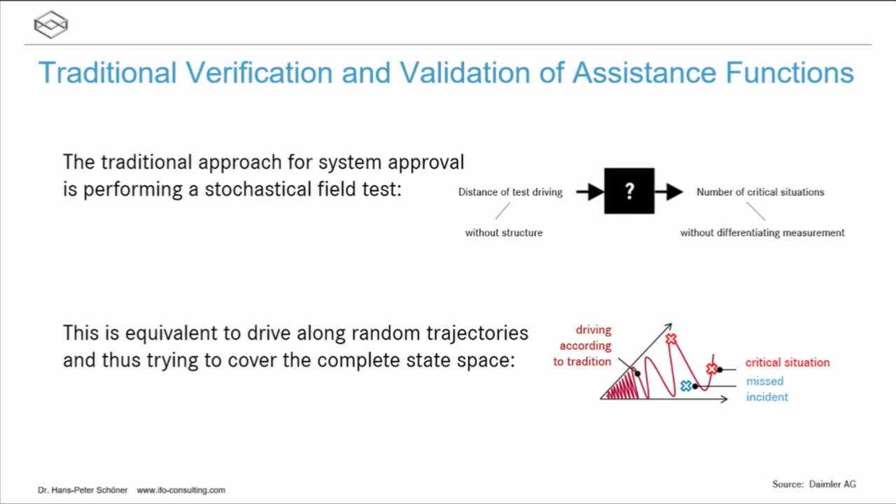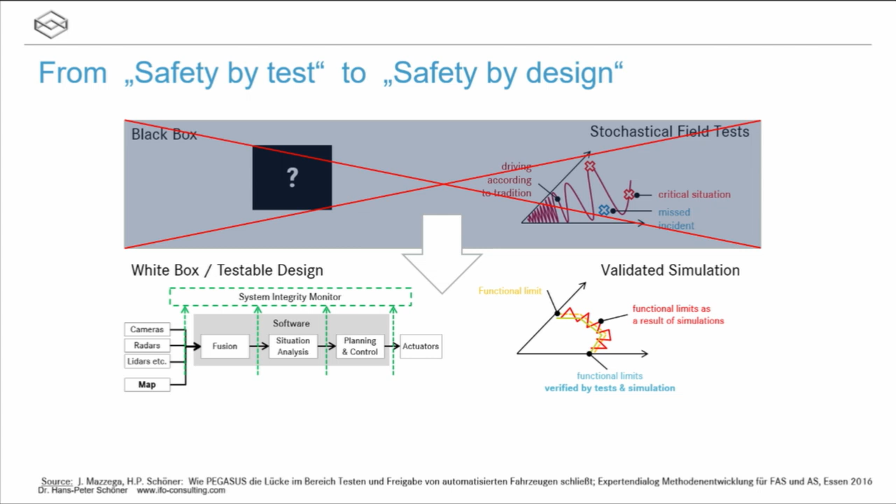So the new approach is to make a white box testable design, separate your function into subfunctions, simulate and test your subfunctions separately with artificially introduced test cases and result verification. And then define your operational limit under which you can prove that it works, and do the tests on the proving ground to verify that you are safe within this operational domain. Yeah, go through that a little fast.

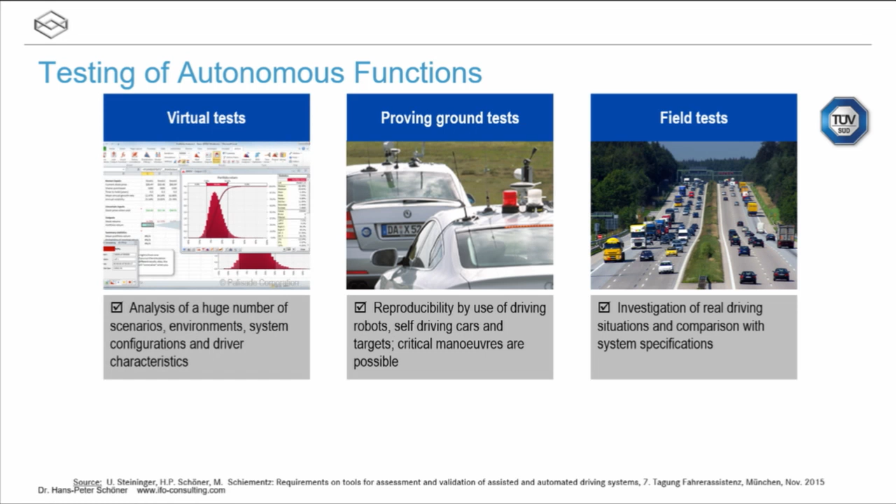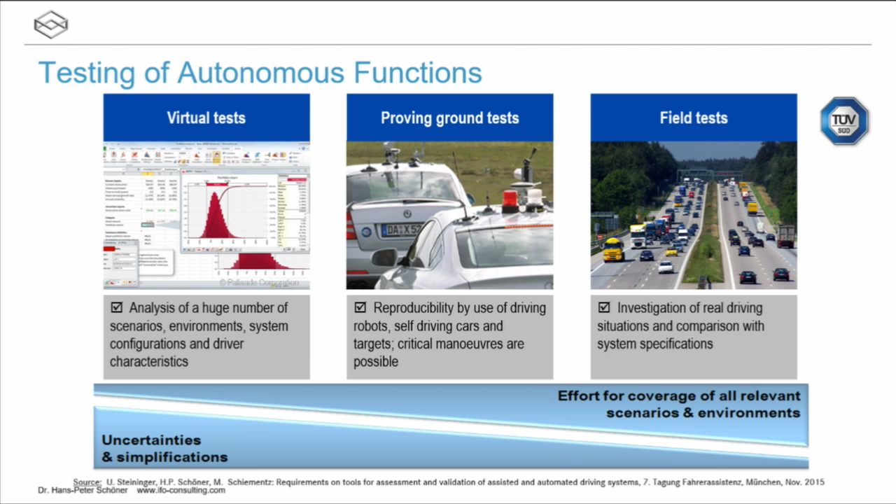Testing, field test, we need that to find all those unknowns. On the proving ground, we can test some specific cases, but not all of them because it would take too long. Most of them have to be done in virtual tests. And for this kind of process, there has been a research project within Germany which just finished, which developed the procedure. One of the key points is using simulation with a virtual driving simulation platform.

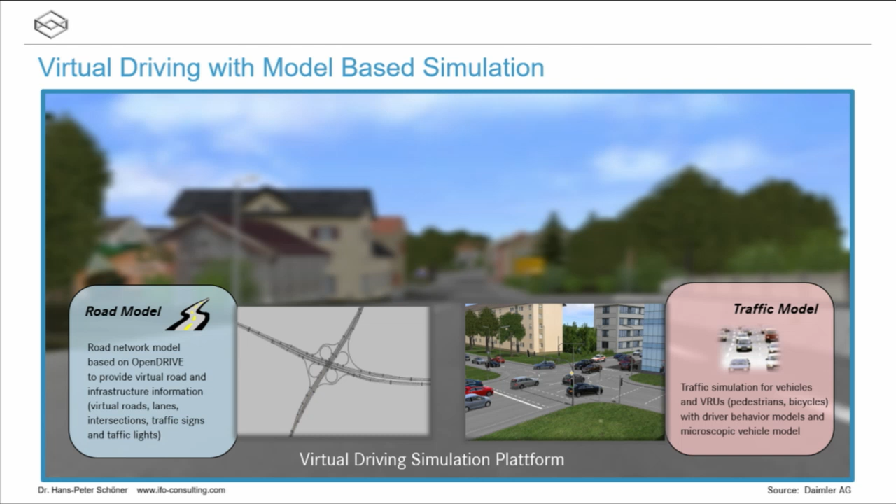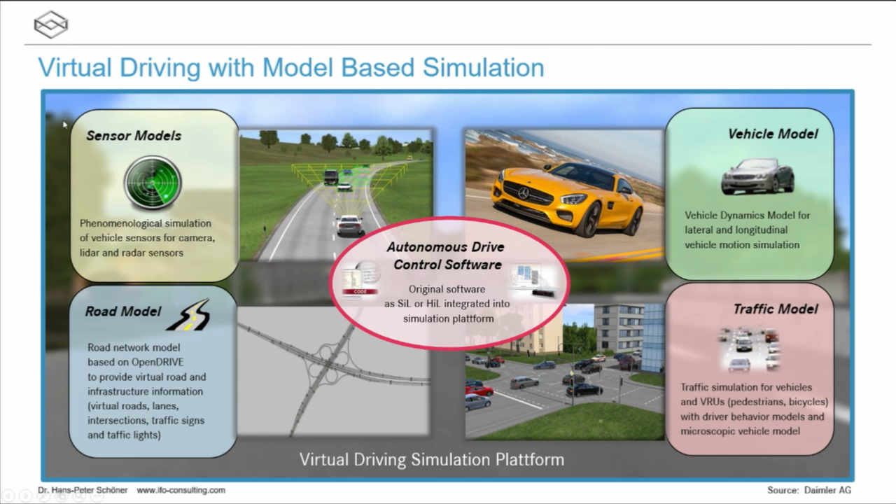What you need for that is road models, traffic models, what is the behavior of the other vehicles especially, but also the model of your sensor, how your vehicle perceives the virtual world in the simulation to replicate the real behavior in the real world. And then of course you need vehicle behavior, and then you can plug in your autonomous drive control software to verify what's going on. Let me skip ahead. So what are the kinds of situations we want to test?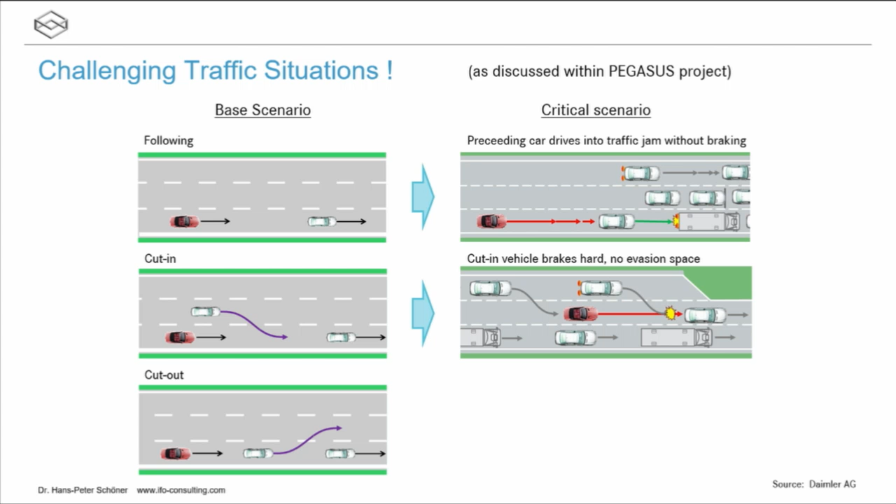Cut in seems to be normal, but cut in when this vehicle comes to the end, it has to cut in. And maybe here is a very tricky situation. That is one of the challenging parts. And cut out seems to be even more easy, but cut out because there's something on the road or even an oncoming vehicle, you have to find some solutions to that.

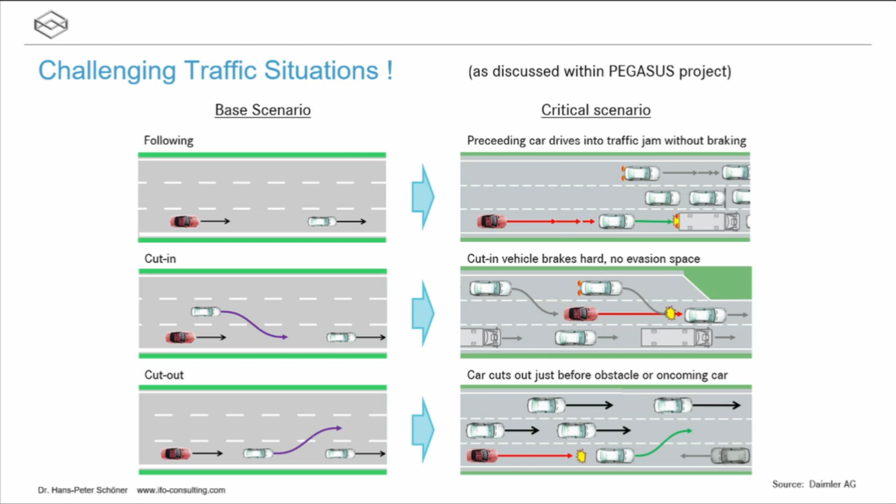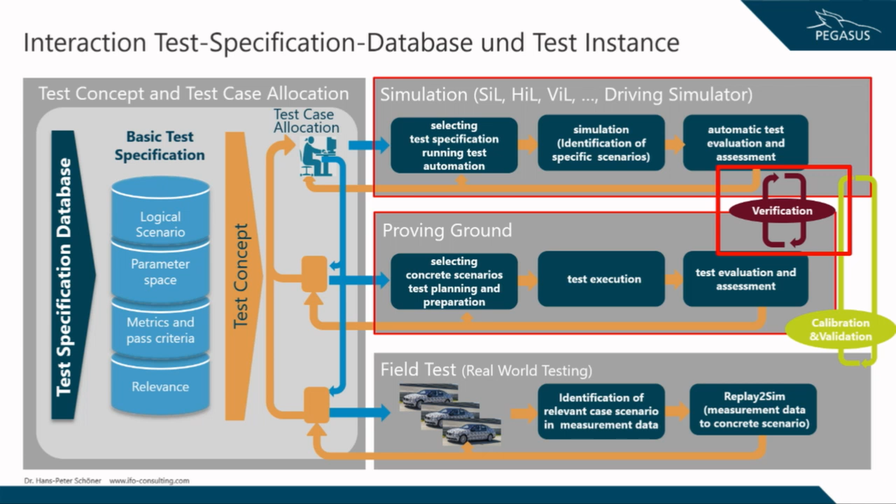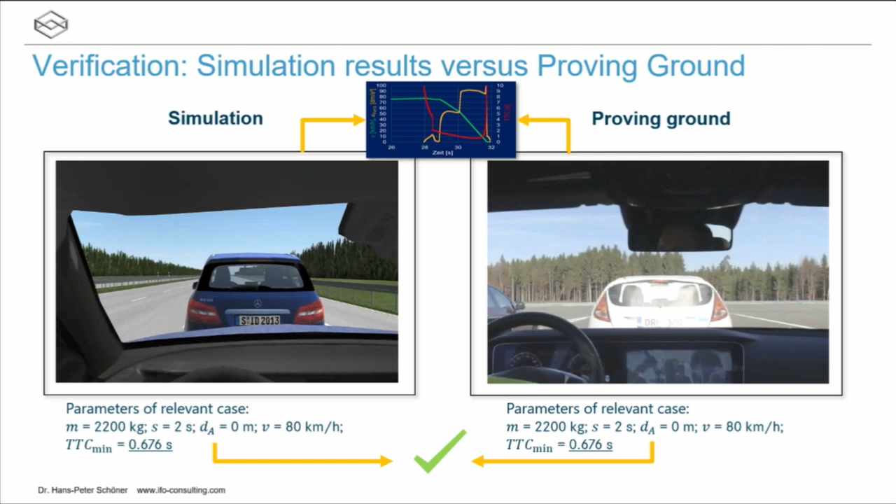Okay, I skip over that. And finally, on the proving ground, what you do is you have certain situations which you simulate. You find out that's a critical case. On the proving ground, you have to replicate the same case and find out that the vehicle is really behaving in the same situation the same way, and then compare the simulation and the proving ground maneuver to make sure that this works together.

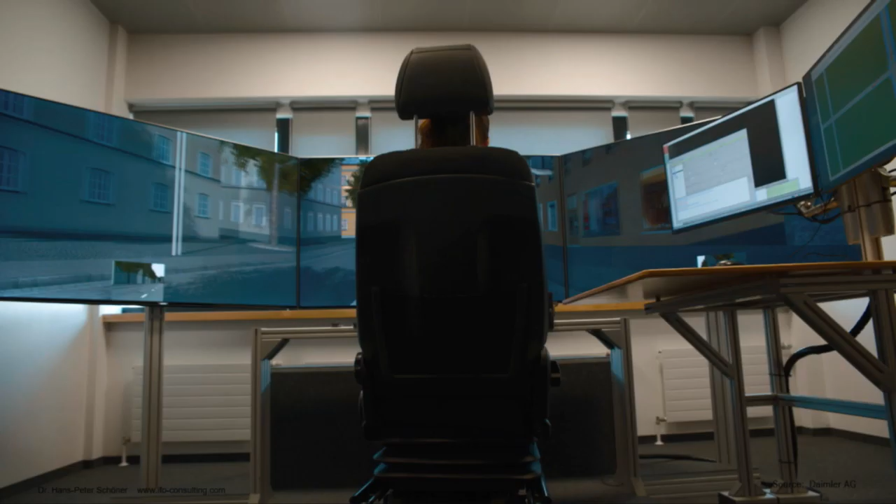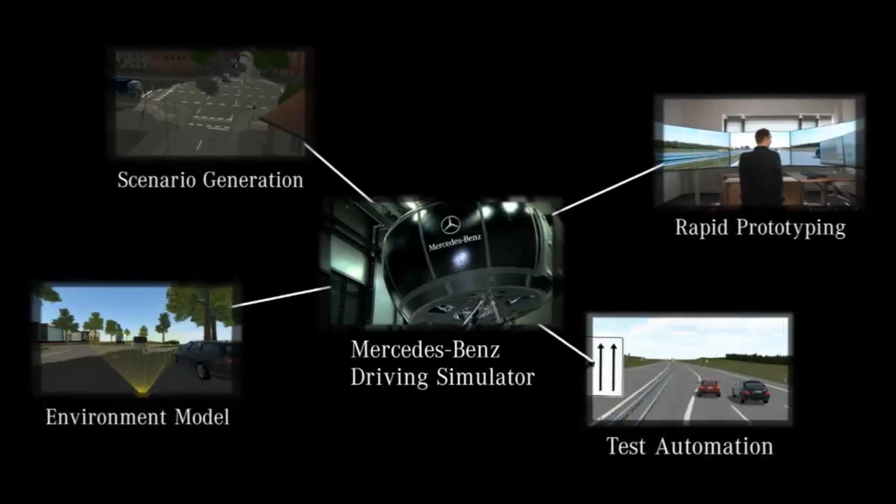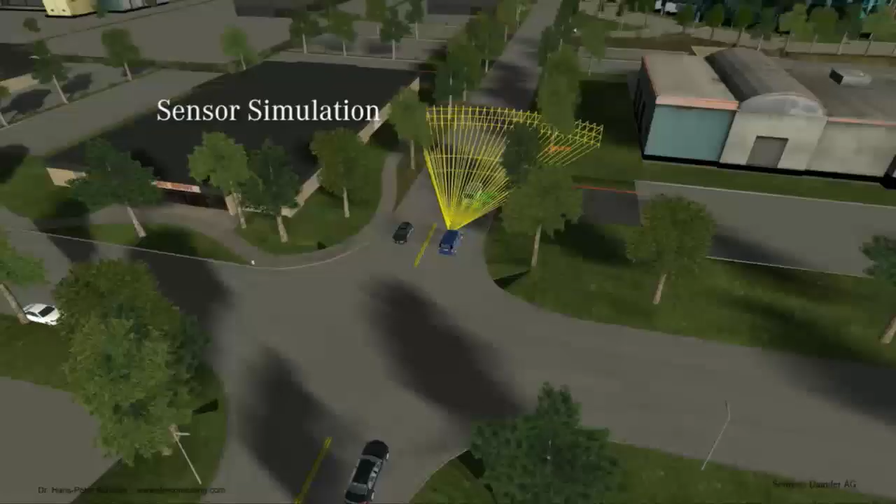And, sorry, this is a short final video now on the simulation tools at the driving simulation center at Mercedes, looking first at environment models of the car, setting up the road network, doing some virtualization of the real world, abstracting it to the important things, looking at traffic situations, like here a priority thing which you can simulate, but also looking at your sensor models so they really can replicate the real world.

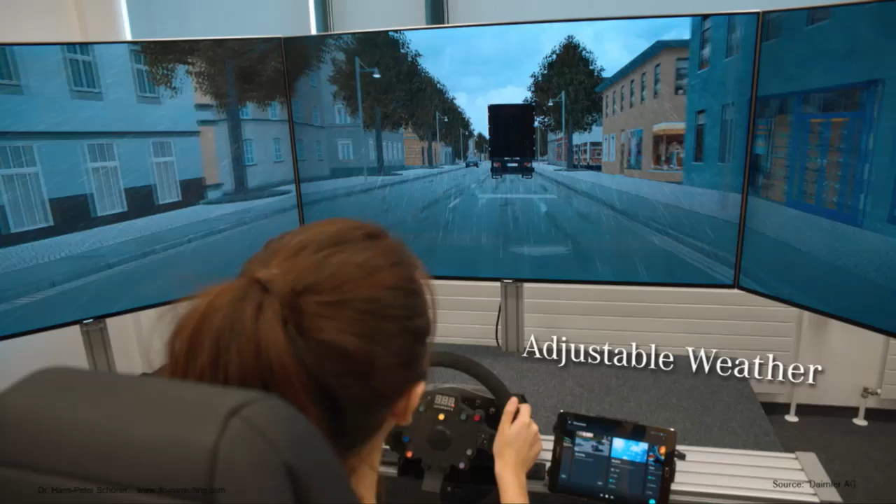Then you have to think about the scenarios. Of course, difficult situations are the challenging part, complex situations. It's a lot of work to design those, but those can be the same for a lot of car manufacturers. So this is a field of cooperation, but testing it with your own driving software is a challenging part.

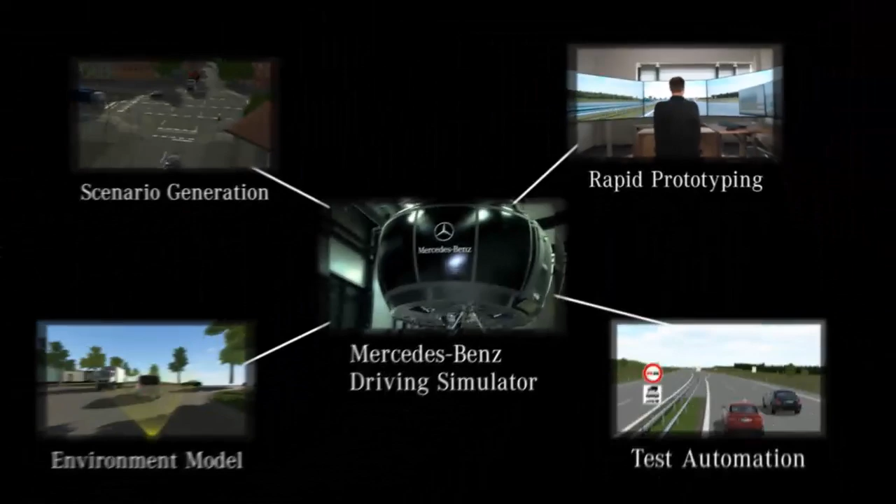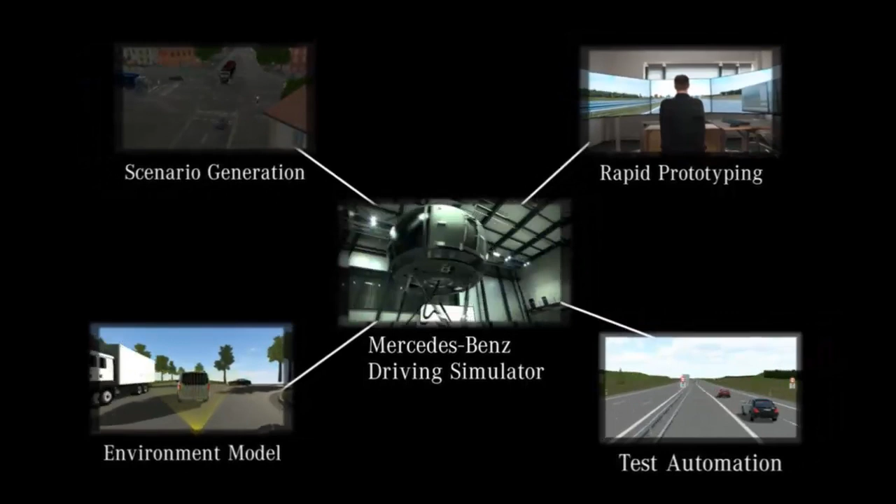To do all this with human drivers, but also testing the software with a lot of different traffic situations which you need to configure: traffic density, situations. Cut-in situations are especially difficult. And the test automation is looking at all those different situations with a lot of different parameters on what would happen in the worst case, and to find out where your limit is of what you can do and what you cannot do. And all this together gives you the testing environment to do testing in simulation.

A lot of this you can do by combining single partial events which don't cause an accident, but the combination of different things, that is the reason for rare events. And then the functions, you have to assess whether you still can cope with those conditions if you understand the rules. You have to judge as an autonomous vehicle whether the limits of autonomy are getting close, to wake up the driver and to announce this early enough so the driver will take over.

And in the worst case, if the driver doesn't take over in level 3, then you have to come to a safe stop. And a safe stop would even be stopping on the road in the center of the lane if you have no other option, and waiting the 10 seconds until the driver takes over. And if he doesn't take over after 10 seconds, you might have the same problem as a human driver with a heart attack on the road. So there must be a bigger problem.

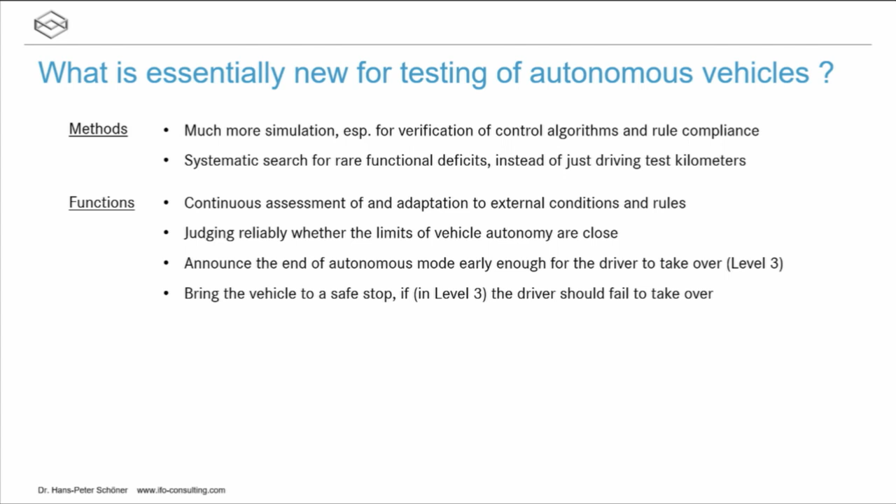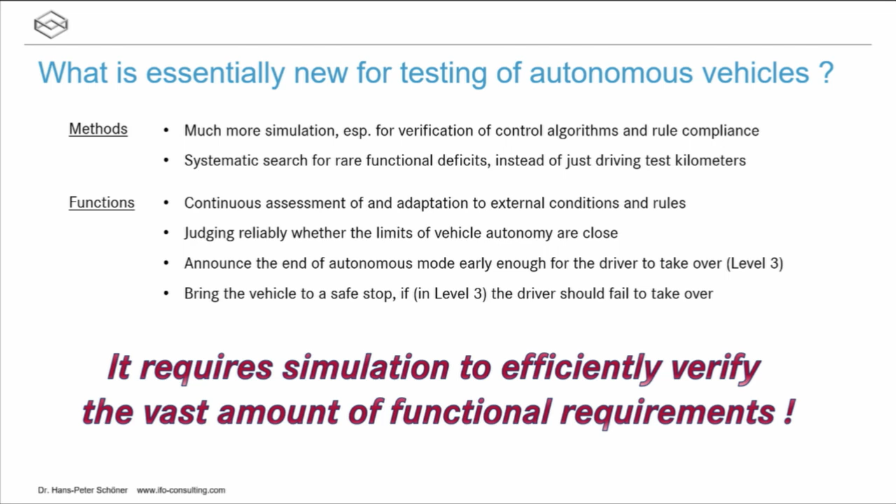Okay, in summary, it takes a lot more simulation to test the functional requirements, but that's only one part of a very big field of getting the autonomous vehicle to run. And more on that tomorrow.

Thank you. Brilliant. Thank you very much. And you will be here for a couple of days. I will be here tomorrow, and I will be here on Thursday. Yes, so I'll be glad also to continue discussion with a coffee, but you decide what is now. I'm a little late now.